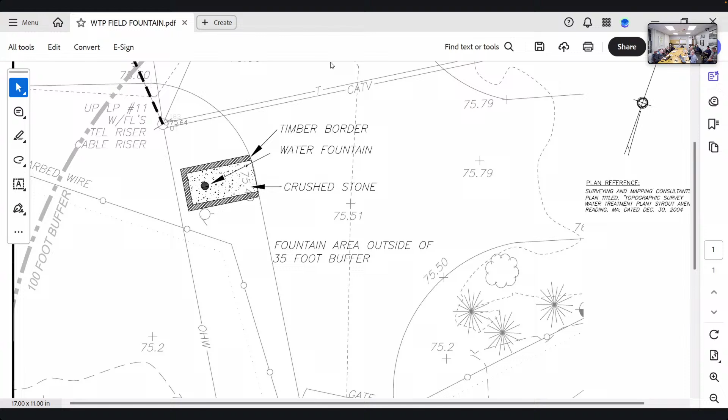While the Commission did request that the wetlands be redelineated in this area, or rather expanded upon based on a different delineation from a different project, the town at this time will not be pursuing this request due to the cost to have that work completed. And number 4 here - at a future date, if Public Works has a need to excavate the pavement adjacent to the location of the water fountain for other reasons, the fountain at that time can be relocated. The fountain will be relocated and a new water line installed from the current location of the water fountain over to the area adjacent to the existing kiosk on the opposite side of the parking lot. When and if this were to happen, conservation would be notified. So we're saying in the future, if we have any significant work down there, at that time we'll run a new water line and move it to the new location.

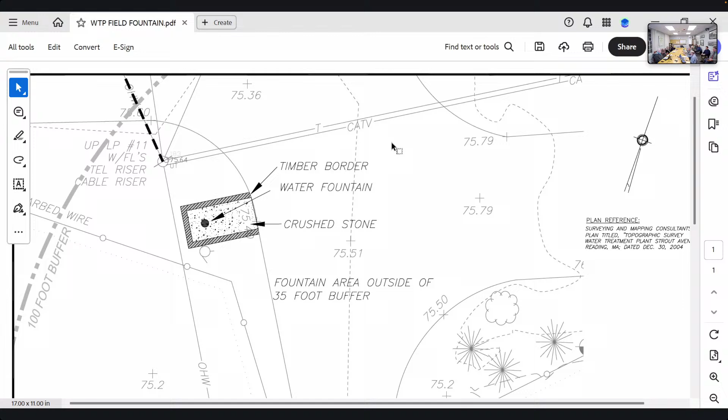That's good. Anything else, Chuck? No. Okay, and that's the last one. All right, so at this point, I think we should get a motion to close this hearing.

Is there a Zoom component today? Yeah, you might want to find out. I'm just figuring it's easier. So, is there anybody out there in the online land who has a comment or question?

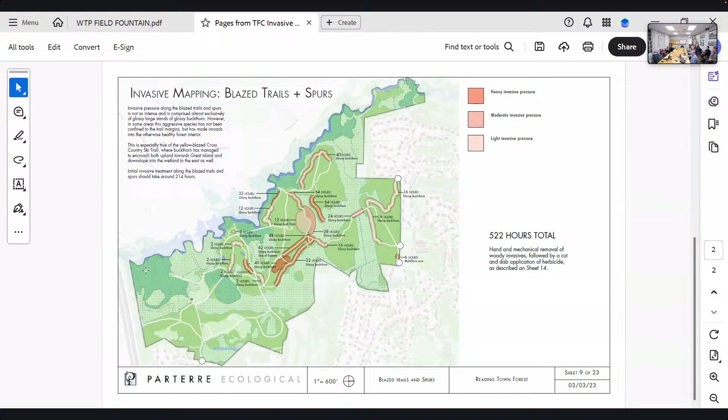Who's doing the work, same as last time? Yeah, it'll be one of the two companies we've been using here, and as we develop a plan we may have to go to bid or get quotes. Is that Parterre or Essex? Essex, yes, and we'll keep you guys in the loop through our monthly meetings or side conversations with Chuck, and let you know where we're going to work, what we'll be doing, and when we'll be doing it.

Okay, so we should vote to approve. Yeah, I think that would be fine. I don't have the number, but you just voted to amend the order of conditions for the trails and spurs to include the access roads. Was it an NOI or an RDA? It was an RDA. Okay, so I move to amend the RDA to include the access roads in the town forest.

This is Tony, I second that. Tony Rodalakis in favor. Walter Talbot in favor. Michelle in favor. Martha Moore in favor. Brian Bowe in favor. Okay, thank you all.

Okay, next on the agenda, it is 532 Pearl Street. I'll read the blurb. He's sitting outside the wall. You want O'Neill? Yeah, you're in. Oh, all set, gentlemen? Oh, you don't want- so we're gonna introduce it first, yeah. Sure. Should we sit? Anyway, okay yeah. Okay, you can bring up the plan and I'll read the book.

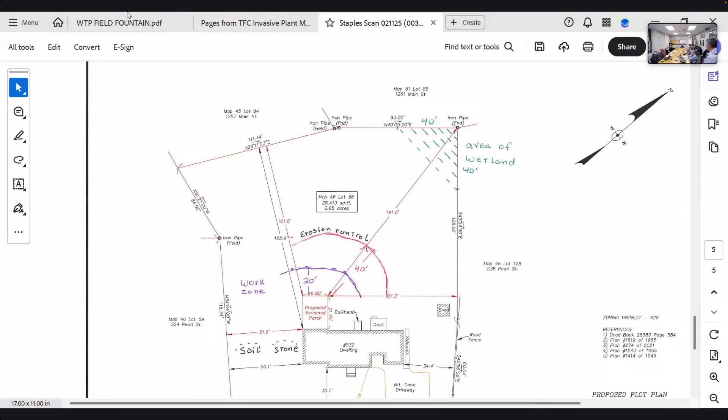Thank you. Can I have a motion to close this hearing, please? I move to close the hearing on 532 Pearl Street.

Public want to speak? Sorry, you're right, I didn't ask that part. Is there anybody out there online who has a comment or a question? Please use the raise your hand function. Seeing none, okay, is there anybody in the room who has a comment or question? Seeing none, can I have a motion to close?

I move to close the hearing on 532 Pearl Street. This is Tony, I second that. All those in favor? Walter Talbot's in favor, Michelle in favor, Martha Moore in favor, Brian, you're in favor.

Do we have any conditions? Yeah, erosion control will be extended to the shed and the brush piles, and the yard waste and general class A trash will be removed from the property. And a planting plan submitted to Chuck.

Any other conditions? Okay, having said that, can I have a motion for a negative determination? This is Tony, I move for negative determination on RDA at 532 Pearl Street. I'll second that. Tony Rodalakis in favor, Walter Talbot's in favor, Tim Michelle in favor, Martha Moore in favor, Brian Bowe in favor.

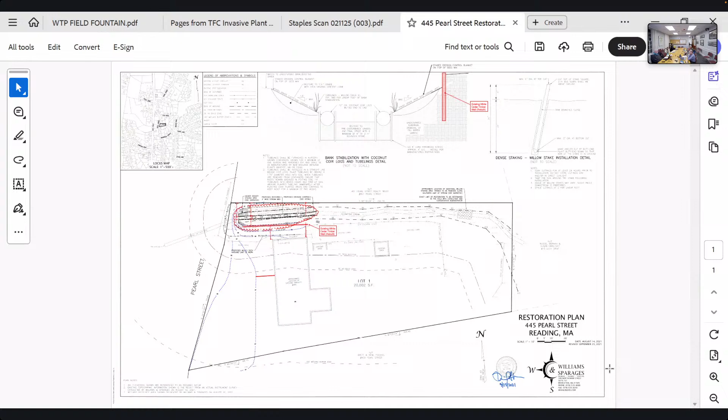Okay, so this is the original plan. I just marked up the location of an existing white cedar timber wall, which I replaced, and I located that on the drawing and noted it. About half of it falls within the scope of the alteration, and the other back half is in the original grades.

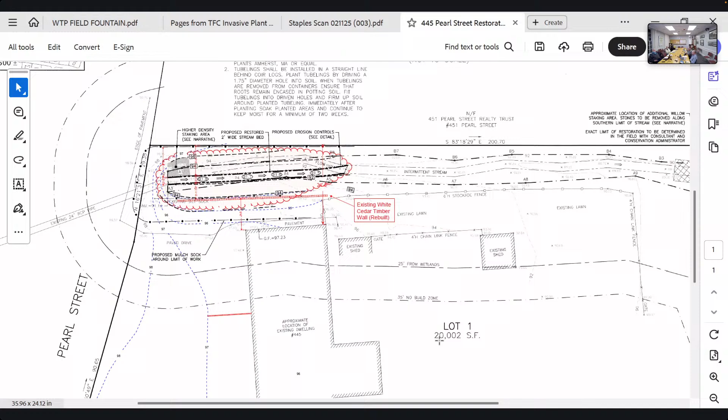Is there anything else you want to add? It's also shown in the section, the cross section of the slope. Yeah, I showed the position of it in that as well. Yeah, I got it. There it is, top right.

Okay, anything you want to say about that? No, I just wanted to throw it in there to clarify where it actually is going to be. Okay, let's see what the commission has to say. Questions, comments? It says existing white cedar timber wall - is that where it is now, or where you're proposing to put it? That's both where it was and is now.

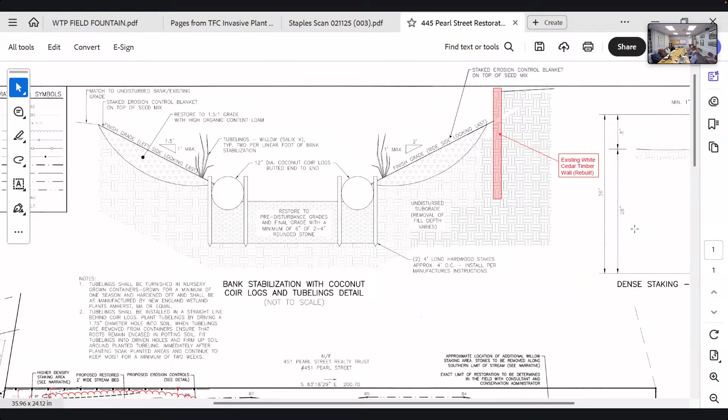That does not match my recollection of the area. I do have some pictures that I sent before I replaced all the rotted timbers. I had sent those pictures previously on this email chain, but I don't know if you have those. Before I pulled out the rotted timbers and replaced them, I took pictures to show exactly where they are.

Okay, put that aside for the moment. Anything else you want to say? No, I can't think of anything unless there are specific questions. Yeah, we're working on that. Martha, anything else? Hang on a second, Chuck has the pictures. I don't have them paired. Talk and I'll try to get these things.

Okay, are there any other questions? Yeah, I've got a couple. So it looks like you're proposing to use some live staking with willow at two stakes per linear foot. That was in the original plan - everything on this drawing, aside from the location of that existing white cedar rebuilt wall, is the original. I guess I was going to ask if you'd also consider hedging your bets by putting in some red osier - that tends to live stake pretty well. I don't know what survival you're expecting with the willow, but you might have better success by mixing in some red osier. Just a suggestion.

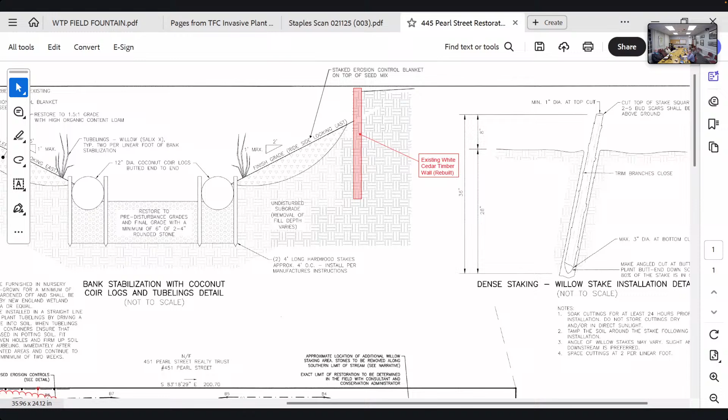So what alternative is there to deal with the things you discovered besides putting this wall in? I'm sorry, I don't understand the question.

Well, so you said that there's some ledge, but there was a wall in the exact same place, exact same height before? Yeah, that wall in the picture there is the existing wall.

And that goes down some number of feet? That goes down several feet.

And is the top of this wall seen in this picture exactly the same distance from the house and from the stream as the one that's there currently? Yes.

Yes, that's why I took the pictures, because when you see it now, it goes directly right by that fence, and I have a picture from the other view that shows how it goes next to the tree.

So when we were there for the site visit, when we met with you and your dad, I could look down at the stream and this sheer wall went straight down with no soil between the wall and the stream, which made me think the wall was closer to the stream than it used to be.

I'm not changing that one. So that one is one of the instances where it says wetland or pond. Right, so that should be changed to within 100 feet of a resource area. So take away 'wetland or pond' and just put 'in a resource area' in its place.

Do you want me to do this now, or should I just mark it up and send it back out? I'll do that. I think there's that, and do we want to capture vernal pools in here?

That's a resource area, isn't it? Are they in the list in the introduction? I didn't see that—give me a quick look. I don't think we would... doesn't mention vernal pool. Yeah, so I would agree with Martha that in that list, we should add vernal pool.

Right after ponds in the second line could be a good place to... although it does say 'such as', and we learned from Bill that gives you flexibility.